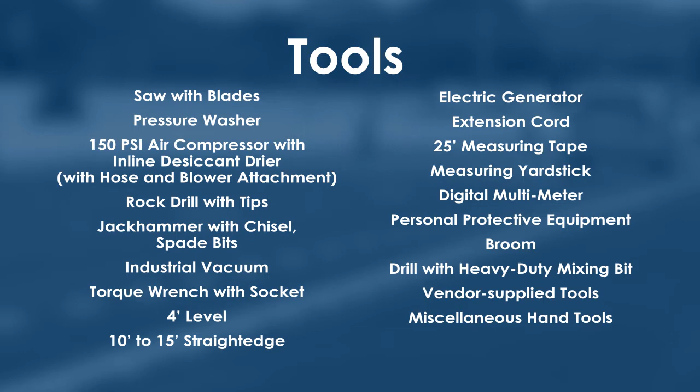In preparation, here is a list of the tools that are needed. This list is not all-inclusive. The manufacturer's installation guide and other project documentation should be referenced for more detailed information and additional preparation requirements. The materials list may also be available in the manufacturer's installation manual, which may contain a list of additional materials that are needed for installation beyond what is provided in this video.

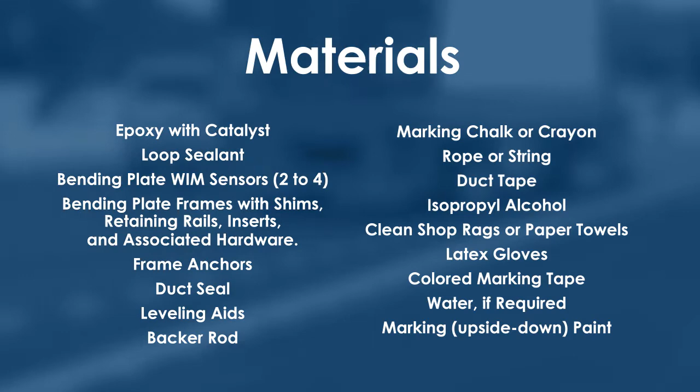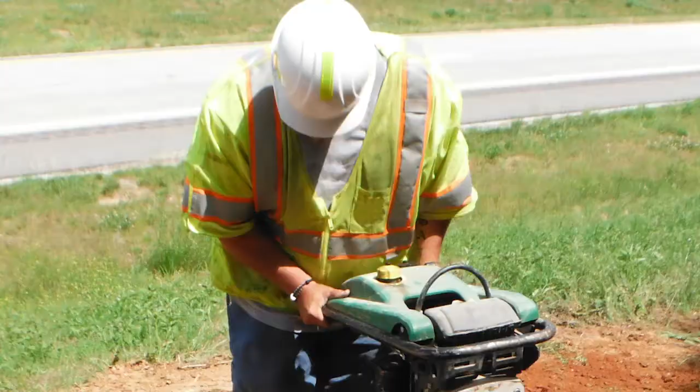It is imperative that all construction crew members wear proper personal protection devices and are briefed on the various hazards associated with working near traffic and in industrial environments. The use of a traffic spotter while working near active traffic lanes is highly recommended.

Let's start the installation process with sensor layout. First, we need to determine the correct location for the frames and loop sensors. To begin, create a reference line perpendicular to the outside pavement marking. From the reference line, measure and paint the locations of the frames and loop sensors on the pavement. A line perpendicular to the lane or pavement edge serves as a reference line for the sensor layout. Use the properties of similar right triangles to assure that the line is perpendicular.

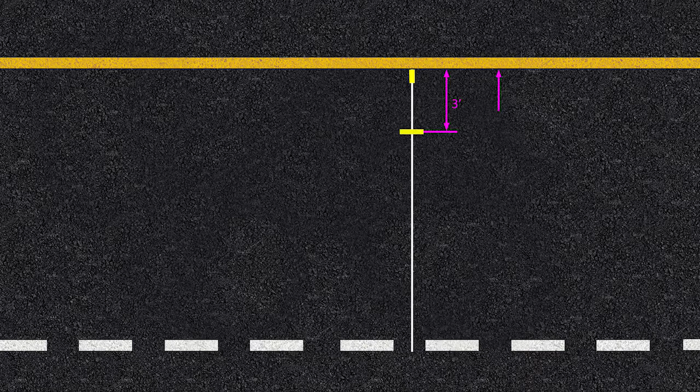At the desirable sensor location, make a mark on the inside edge of outer pavement marking. From the original mark, walk straight into the travel lane and place additional marks at 3 feet, 6 feet, and 9 feet from the original mark. Next, walk along the pavement edge and place additional marks along the inside edge of the lane, marking at 4 feet, 8 feet, and 12 feet from the original mark.

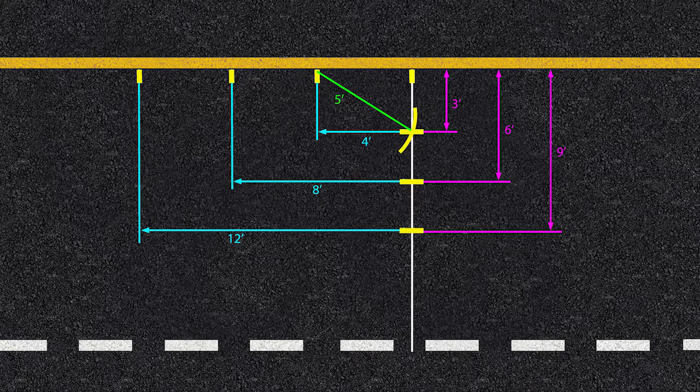Extend the tape from the 4-foot mark toward the 3-foot mark. Measure to 5 feet and draw the arc that intersects the 3-foot mark. Extend the tape from the 8-foot mark toward the 6-foot mark. Measure to 10 feet and draw an arc that intersects the 6-foot mark. Extend the tape from the 12-foot mark toward the 9-foot mark. Measure to 15 feet and draw an arc that intersects the 9-foot mark.

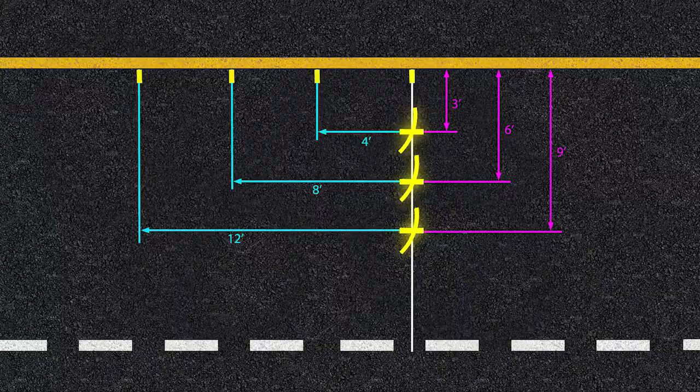Once all the marks are drawn, there will be 3 sets of X's in the lane. Starting at the original mark, extend a string across the travel lane, intersecting each X. This is a perpendicular reference line. Spray paint over the string or rope to create the perpendicular guideline to follow during sensor slot cutting.

Remember these 3 tips for sensor layout quality assurance. First, ensure the layout of the frames and loop sensors are perpendicular to the pavement markings by verifying the proper use of the right triangle method when creating the reference line. Ensure that ambiguous paint marks are crossed out or blacked out to avoid confusion. All sensor pavement cut measurements should match what is documented in the contract and must follow manufacturer installation guidelines.

The second topic is saw cutting and includes 3 steps. First, align the saw blade with the painted markings. Then, slowly lower the blade into the pavement to the specified depths. Finally, cut along the pavement markings from the starting point to the ending point. Do not overcut the frame saw cuts.

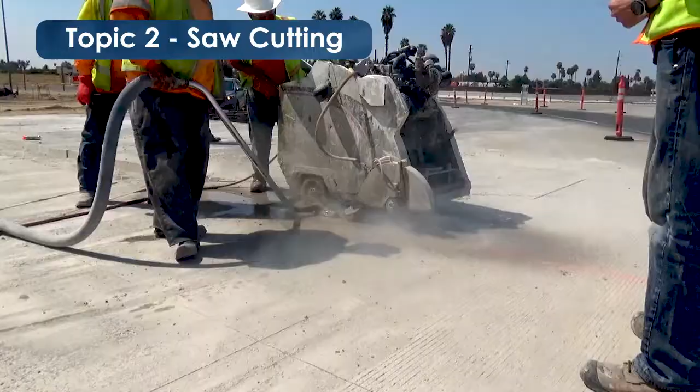The saw operator lowers the blade into the pavement at the specified depths. If water is being used, keep the water running to keep the dust minimized and the blade cool during operation. Otherwise, ensure the operator is wearing a dust mask and use compressed air to blow the dust away from the operator. The operator will cut as straight as possible along the previously made pavement markings.

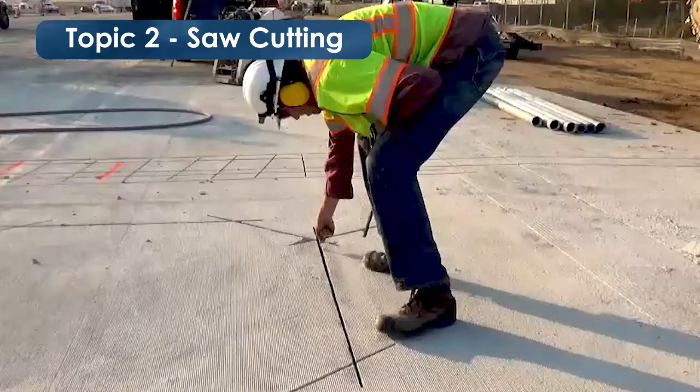The corners of the loop sensors are overcut to ensure the blade has met the minimum depth where the loop wire will be placed. Use a depth gauge to make sure that all cuts are at the proper depth.

To assure proper sensor saw cutting, be sure you can answer yes to these 4 questions. Is the blade the correct size? Are all the saw cuts at the proper depths? Are the saw cuts straight and along layout painted markings? Are overcuts made at the corners of the loops?

Frame recess and loop slot preparation is the 3rd topic. For this step, excavate the material from the frame recess using a jackhammer with spade bits. Drill anchor holes to the proper depth using a rock drill. Blow excessive debris out of the slot.

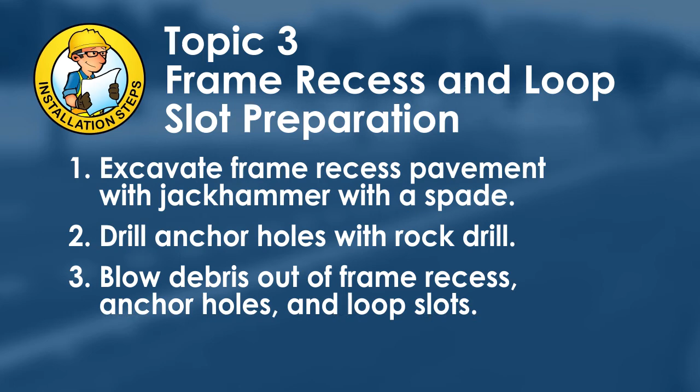Clean the frame recess, anchor holes, and loop slots with high-pressure water and/or air and vacuum. If water is used, dry the recess, holes, and slots with clean pressurized air until all moisture is gone. Or, scrape or brush the sides of the recess and the holes to remove all excess debris and then blow everything clear.

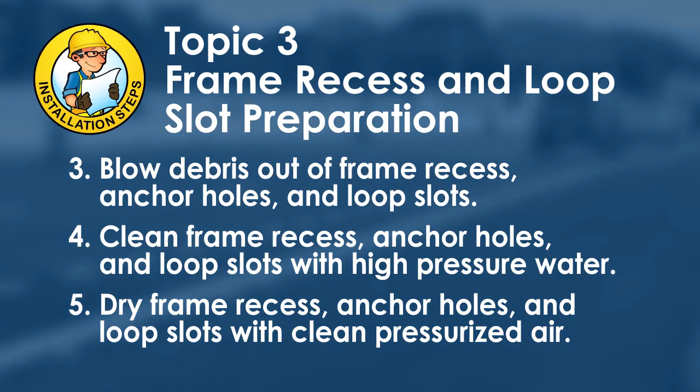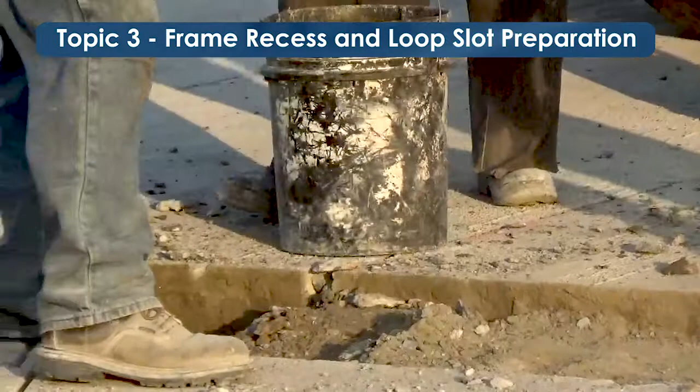The crew will use a jackhammer with spade bits to remove the pavement from the interior of the frame recess. When complete, the excavated area will allow the installation of the frame with a little bit of extra room beneath. Some installations may include drain channels that will be excavated lower than the load-bearing areas.

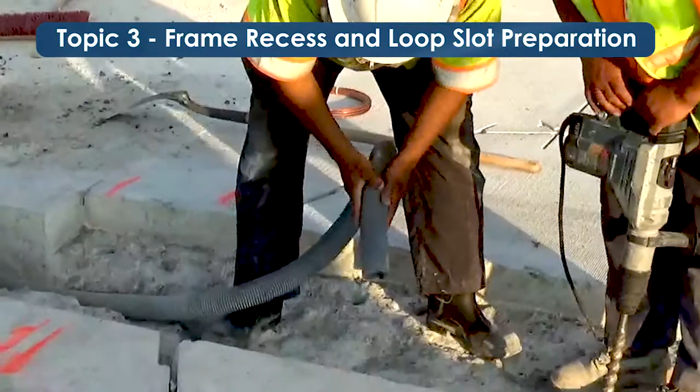The anchor holes will be drilled with a rock drill with a 1 inch to 1.5 inch bit at a 90 to 45 degree angle to the required depth depending on the type of frame. All loose pavement and debris is removed from the frame recess. Loop slots in the frame recess and anchor holes are blown out with high-pressure air.

The crew may blow the frame recess, anchor holes, and loop slots with clean, high-pressure air or rinse it with a pressure washer, moving side to side and away from traffic until all debris and standing water has vacated the slot. Whether using water or not, the recessed area, including the anchor holes, is blown with clean pressurized air until all standing water and other debris is gone.

For quality assurance, ensure that the frame recess and anchor holes have been excavated or drilled to the proper depths. Ensure that the frame recess, anchor holes, and loop slots are clean and dry and that no standing water remains. Check the entire frame recess, each anchor hole and loop slot to make sure that they are the proper size and depth over the entire length and width.

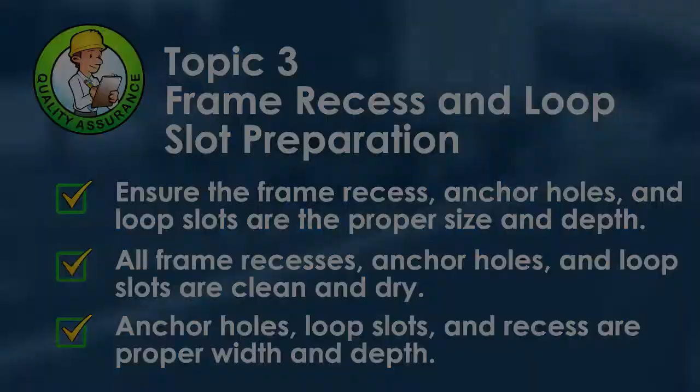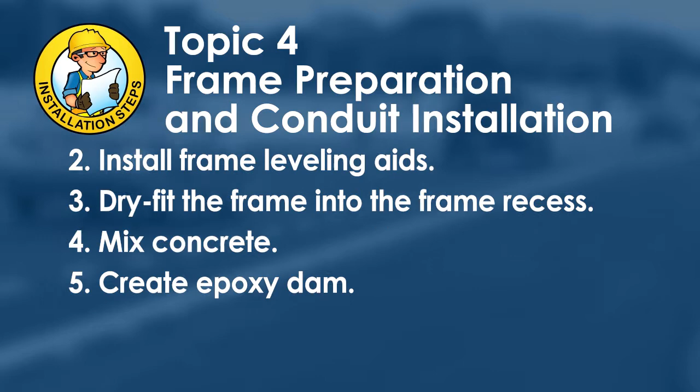The next topic is frame preparation and conduit installation. For this step, the drain and lead-in conduits are installed. The frame leveling aids are installed and the frame is dry fitted into the recess. Concrete is then mixed and applied to the inside of the frame to create the epoxy dam. Depending on the type of frame being installed, the frame may or may not be removed. The conduits are then plugged to prevent debris or epoxy intrusion.

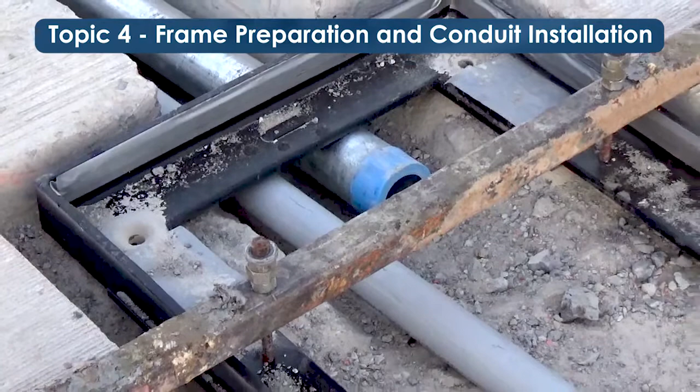The metal drain and electrical conduits will be installed in the home run slots, with the drain conduit at least 1/2 inch lower than the electrical conduit. 1 inch PVC will be installed in the loop home run slot where it enters the frame recess. The leveling aids, which may be prefabricated, will be installed on the frame.

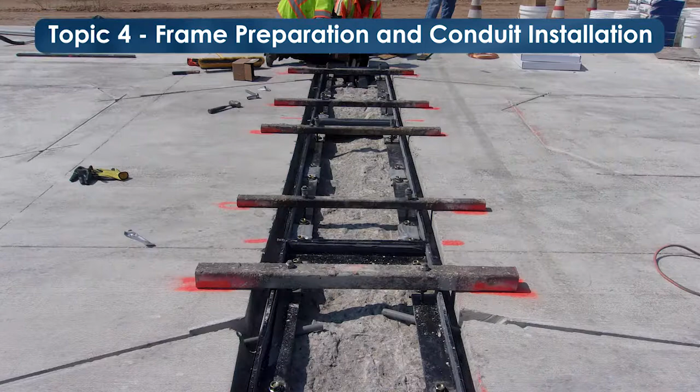The frame is dry fitted into the recess to ensure adequate clearance for the conduit and to adjust the leveling aids to set the frame at the right height. Once the frame is set to the proper height, concrete is mixed and packed in around the inside of the frame and around the conduits to create a dam that will prevent the epoxy from entering the electrical drain channel that runs down the middle of the frame recess.

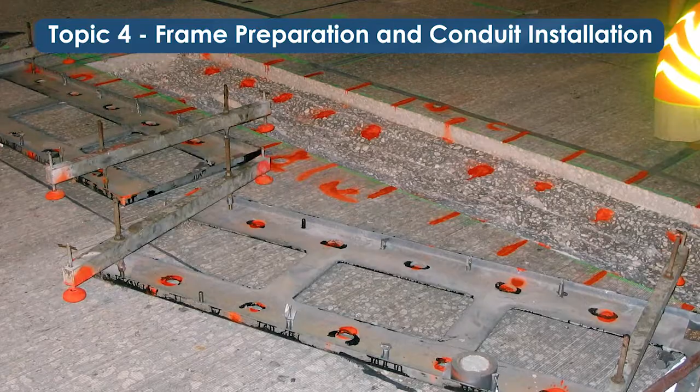While the concrete is still wet, the frame may be removed and set beside the recess, or it may remain in place and additional anchors will be installed. Allow the concrete to harden just enough to have enough structural integrity that it will hold back the epoxy when it is poured. Place duct tape over the ends of the conduits to prevent epoxy or dirt from entering them.

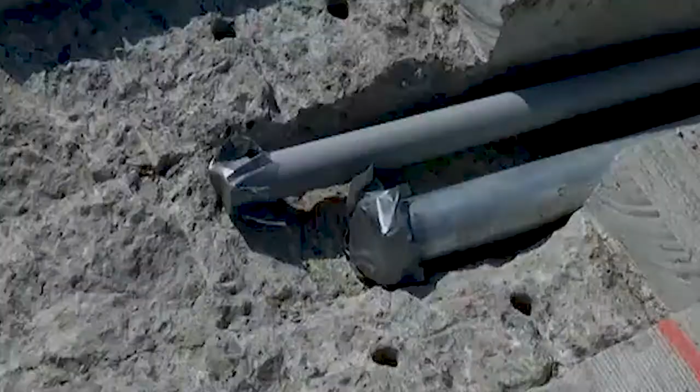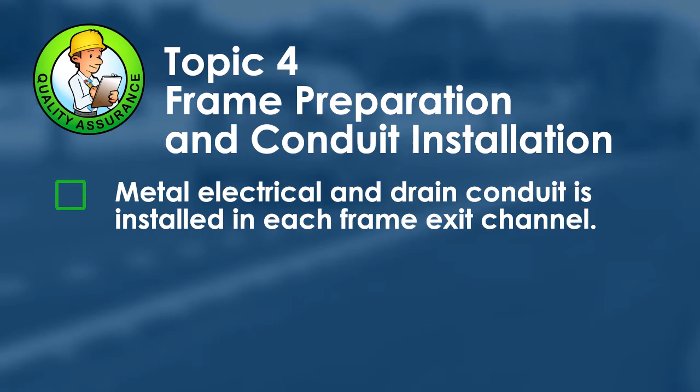To ensure proper frame preparation and electrical drain conduit installation, follow this quality assurance checklist. Metal, electrical, and drain conduit is properly installed in each frame exit channel. PVC is installed for each loop entry into the frame recess. The frame leveling aids are properly installed. The frame fits into the recess properly.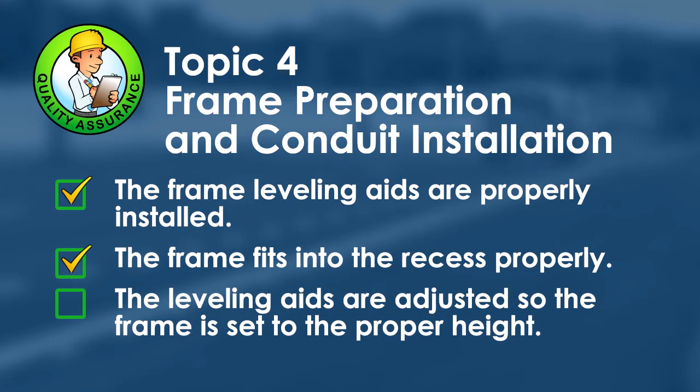The leveling aids are adjusted so the frame is set to no higher than 1/16 of an inch below the pavement surface at the highest point. The concrete is mixed according to the manufacturer's instructions. The epoxy dams are installed. The drain and electrical conduit ends are covered.

The next topic is epoxy mixing and pouring. It includes 6 steps. First, pre-mix the epoxy, combining the sand with the resin. Next, add the hardener and mix per manufacturer instructions. Within the prescribed time, pour the epoxy first into the anchor holes to ensure that they are full, then around the frame so that it pours down around the sides of the frame.

If the frame has not yet been placed, fill the recess area up to the top of the concrete dam. Use a trowel to sweep the epoxy up on the outside edges. Use a wire brush to scratch the epoxy into the outside vertical edges. Then set the frame into the recess and apply pressure to push it down into the epoxy.

The epoxy will be mixed according to the manufacturer's instructions. Once the epoxy has been properly mixed, it will be poured quickly into each of the anchor holes until they are filled. Then, the epoxy will be poured into the frame-bearing area on the outside of the concrete dam until it reaches the indentation left by the frame during the dry fit.

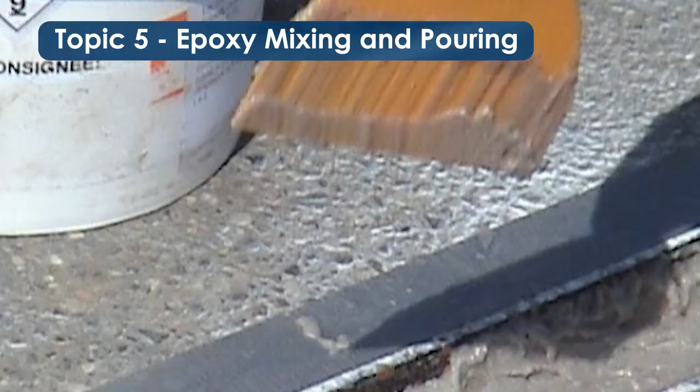If the type of frame being used is placed after, the epoxy will be swept up on both sides of the slot using a trowel, then scrubbed into the vertical sides of the frame recess before the frame is placed.

Be sure you can answer yes to these questions for epoxy mixing and pouring quality assurance. Was the epoxy mixed according to the manufacturer's instructions? Were the anchor holes filled with epoxy? Were the frame-bearing areas filled with epoxy up to the top of the concrete dam? Was the epoxy swept up on both sides of the recess? Was the epoxy scrubbed into the vertical sides of the recess using a wire brush?

Topic 6 is frame installation. This topic is discussed for installations where the frame was removed after it was pre-fitted into the recess. This topic involves 3 steps: installing the frame into the recess, hammering the anchor bolts into the anchor holes, and cleaning off the excess epoxy.

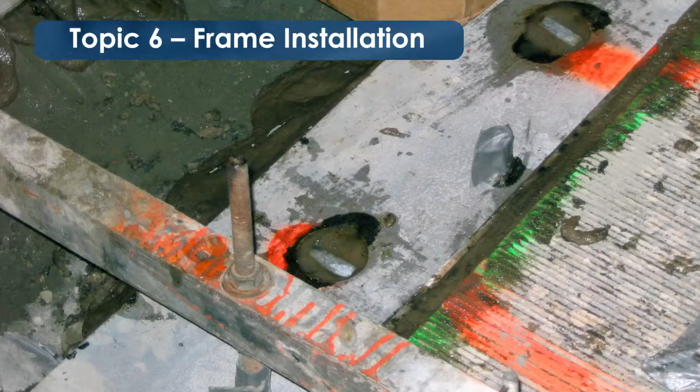If the frame was pulled during the epoxy pouring setup, the crew members will replace the frame using the indentations on the concrete dam as a reference, push the frame down into the epoxy, and place weight on the frame to hold it in place. The next step is to install the anchors into each of the anchor holes until the anchor heads are completely flush within the anchor head recesses in the frame.

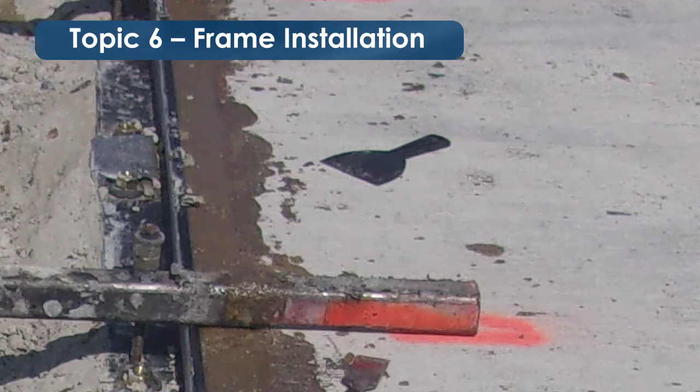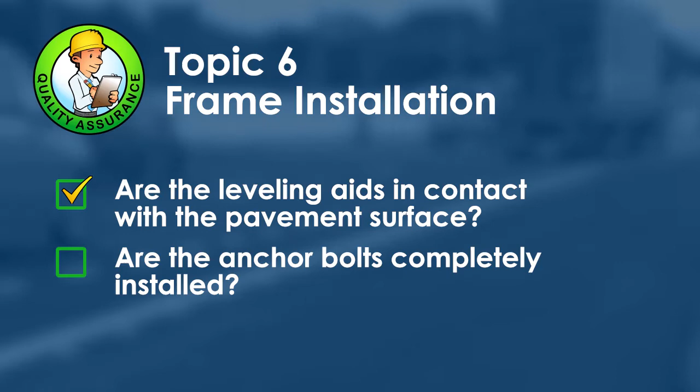After the anchors are installed, weights will be placed on the leveling aids and frames to keep the frame from floating up. Once the position of the frame is set, excess epoxy will be scraped from the frame and the roadway. Be sure you can answer yes to these questions for frame installation. Are the leveling aids in contact with the pavement surface? Are the anchor bolts completely installed? Has all excess epoxy been scraped from the frame and the roadway?

Topic 7 is epoxy curing and frame cleanup. Here are the steps. After the epoxy is hardened, remove the weights and leveling aids from the frames. Use a grinder to remove any remaining epoxy from the frame and roadway. Clean the frame and paint any bare metal areas with rust-proof paint.

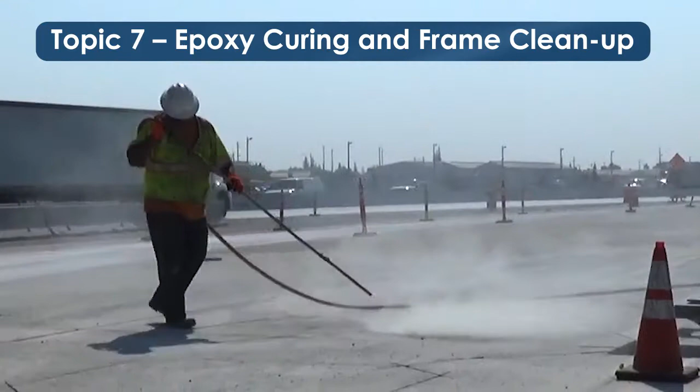After the epoxy is cured, the weights and leveling aids will be removed from the frame. Any excess epoxy on the frame and the roadway will be ground down. The frame will be cleaned off with pressurized air. Any exposed metal areas will be painted with rust-proof paint.

Here is a list of quality assurance tips for epoxy curing and frame cleanup. The epoxy has fully cured. All excess epoxy has been removed from the frame and roadway. The frame was properly cleaned. All bare metal areas were painted with rust-proof paint.

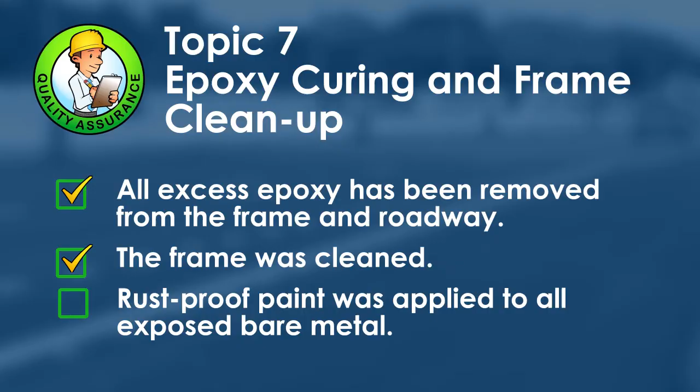Topic 8 is insert installation. Some vendors require the use of a conversion insert to accommodate the use of bending plates with the frame. If this is required, there are several important steps associated with this process. First, carefully place the insert into the frame. Next, mark the anchor holes and pre-drill the holes.

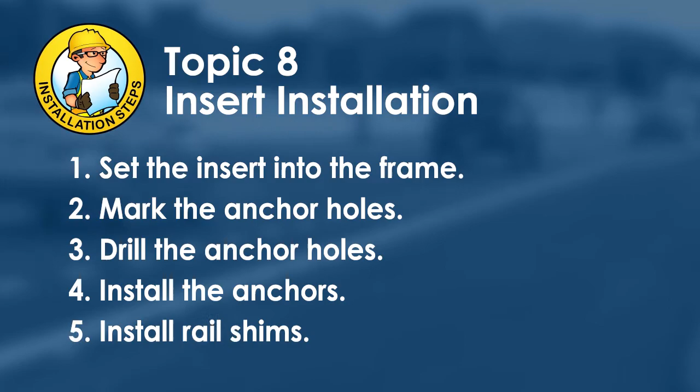Use a hammer drill to drill each of the anchor holes. Install the anchors onto the insert and replace the insert in the frame. Next, epoxy the anchors into place. Finally, place the shims onto the insert.

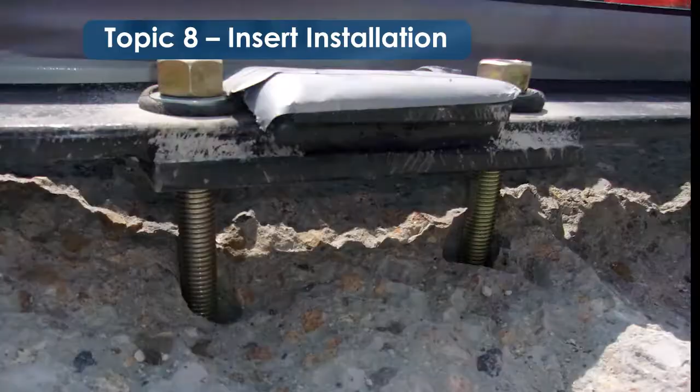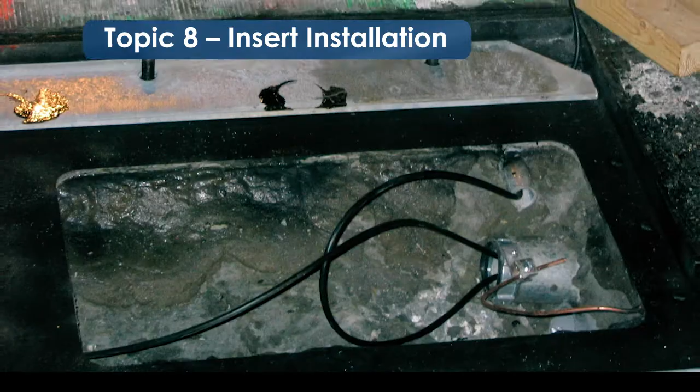The insert is carefully removed from the box or crate and placed inside the frame. The anchor holes are then marked with spray paint and pre-drilled. The insert is then removed so the anchor holes can be drilled out and the anchors can be mounted onto the insert. The insert is then placed into the frame so that each of the anchors goes down into the drilled holes. The anchors are then epoxied. Lastly, the shims are placed in the insert.

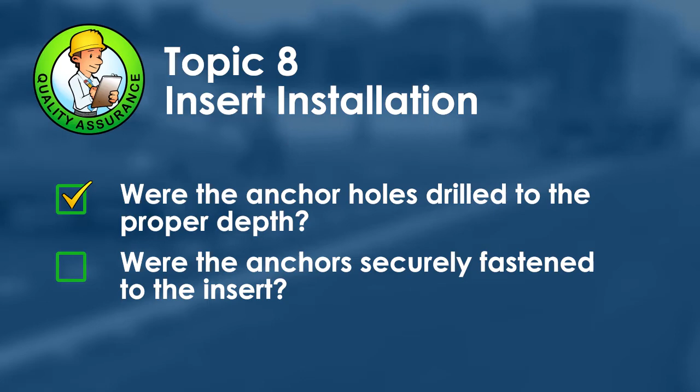Be sure you can answer yes to these questions for insert installation quality assurance. Were the insert anchor holes drilled to the proper depth? Were the anchors securely fastened to the insert? Do the anchors fit properly into the anchor holes? Were the anchor holes filled with epoxy? Were the shims placed on the insert?

Topic 9 is bending plate installation. There are several important steps associated with this process. First, carefully remove the sensor from the box and place it on pieces of wood near the frame. Uncoil the sensor lead and run the lead through the small conduit or hole in the frame and through the sensor conduit to the pull box. Lift the sensor and carefully lower it into the frame.

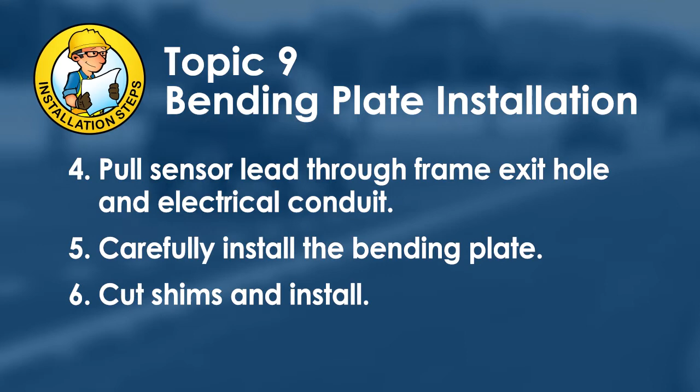Use a 4-foot straight edge or level to determine if any shims are needed to make the top of the bending plate flush with the pavement surface and install the shims. Install the securing rails and use a torque wrench to tighten the nuts onto the bolts. Check the top of the bending plate with a straight edge to make sure it's flush with the pavement surface.

If it is not, measure the gap, remove the securing rails and weigh pad, and add or remove rail shims as appropriate. Reinstall the securing rails and torque the retaining bolts down. Caulk the bolt holes and around the edges of the bending plate where it meets the frame.

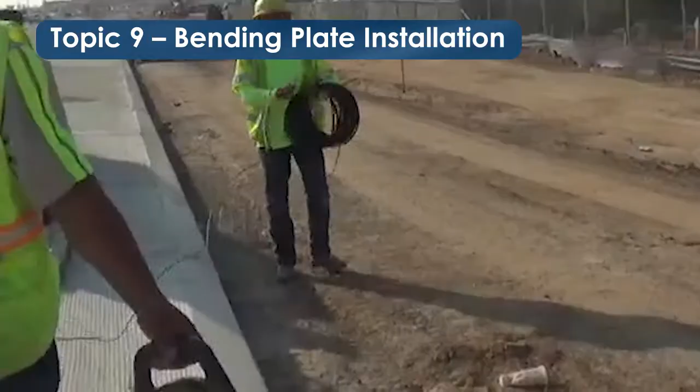The bending plate is carefully removed from the box or crate and placed upside down on pieces of wood next to the frame. The lead-in exit is aligned with the lead-in conduit welded to the frame. The lead-in cable is carefully uncoiled, run through the frame conduit, electrical conduit, and into the roadside pull box.

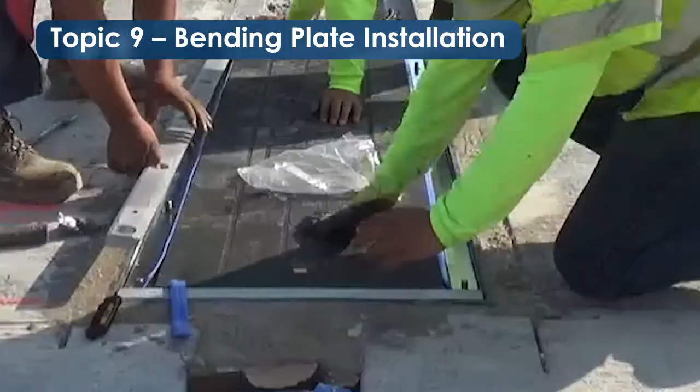After all the shims have been placed, the bending plate will be lifted into place, turned over, and lowered into the frame. The retaining rail shims are then installed, followed by the retaining rails. After the rails are secured using the associated hardware, the nuts are torqued down to within specification, and the height of the bending plate is checked with a straight edge.

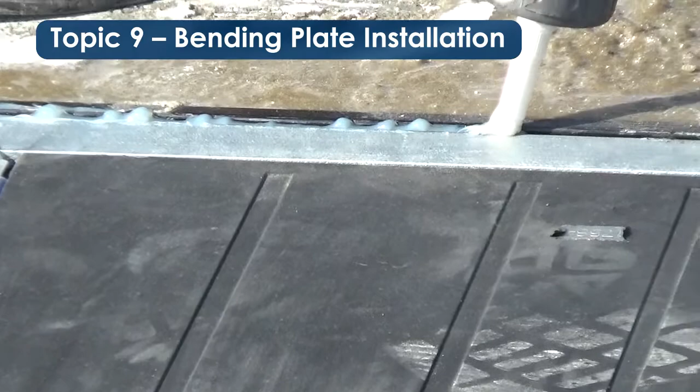If the bending plate is not flush with the pavement, the retaining hardware is removed, the frame is reshimmed, and the bending plate is reinstalled and rechecked. Once the bending plate is flush with the pavement surface, caulk is applied to the edges of the frame and to the securing hardware holes.

Be sure you can answer yes to these questions for bending plate installation quality assurance. Were the lead-in cables carefully uncoiled and pulled through the conduits? Were the retaining nuts properly torqued down to manufacturer specification? Is the bending plate installed flush with the pavement surface? Was caulk applied to the frame edges and the retaining bolt holes?

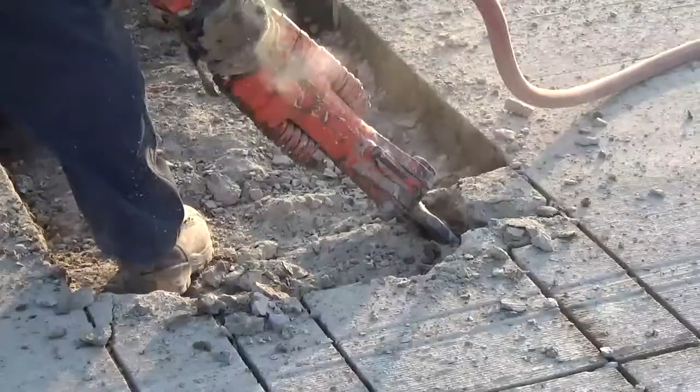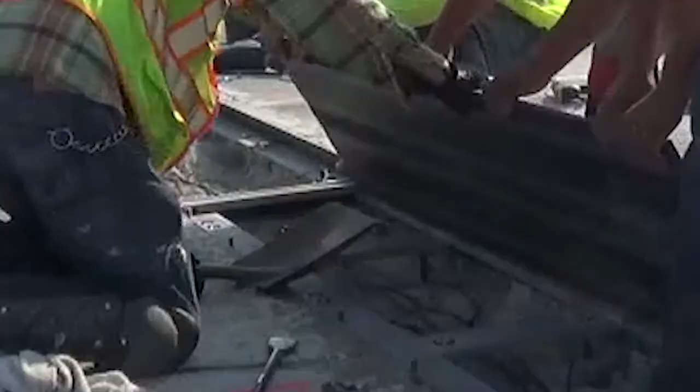The information presented in this video will ensure that the sensor is properly installed by demonstrating each of the critical steps involved and providing several quality assurance checks for each step. The proper installation of the bending plate sensor will extend the service life of the sensor and ensure a higher level of WIM data quality for the life of the WIM system.